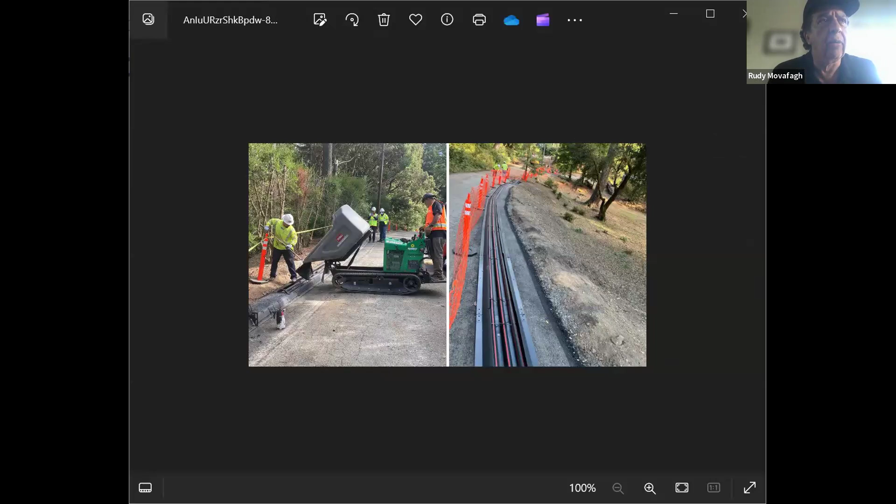In my previous life, when folks decided, okay, I'm going to spend more money, take the overhead down, and build on the ground, there were a number of challenges I tried to solve with my invention. When you have hard ground—rock, granite—it's very, very expensive to excavate. So that's one issue there.

Other places have potentially contaminated soil or asbestos, and the cost of digging up and cleaning that soil is prohibitive to building underground. It becomes too expensive for them.

They were concerned that the roots of the trees would be damaged by the undergrounding system, and they wanted to protect the natural habitat of their neighborhood. So the utility decided, hey, we've got this concept—this seems to be the right fit for what we're trying to do here.

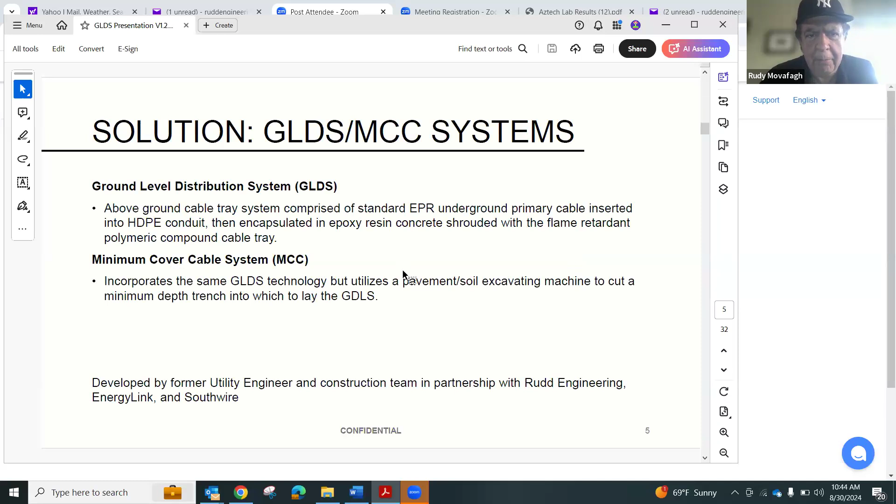So there's two types of construction with GLDS, we call it ground level distribution system, or minimum cover cable system. It can be a bit underground, shallow underground. We do basically a 10-inch trench, bury the system, and put 6 inches of soil on it - actually 1 inch of soil and 4 inches of pavement. We do that where there are water runoff issues, stormwater issues, or if we're crossing driveways and don't want a huge bump on the road across someone's driveway.

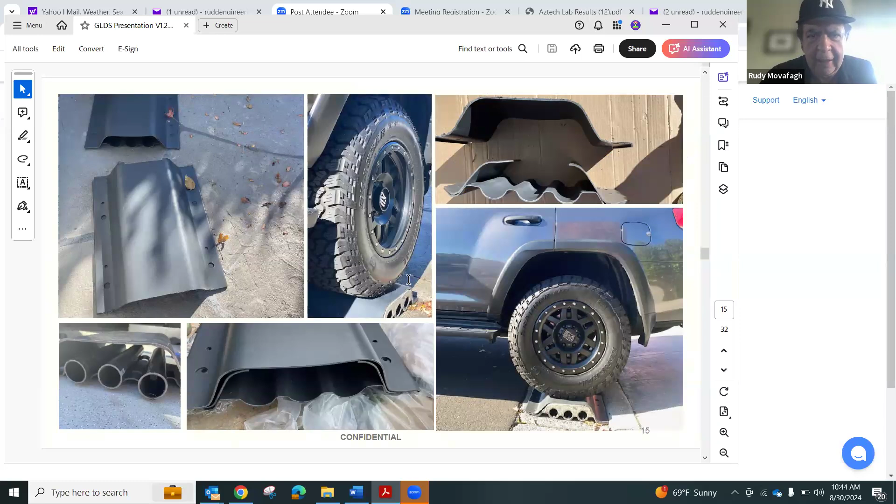I can share this information with you, but I want to really get into how this thing was made. I kind of made this in my garage, started doing it, enhancing it, and ultimately we did a test at the lab where we installed the system.

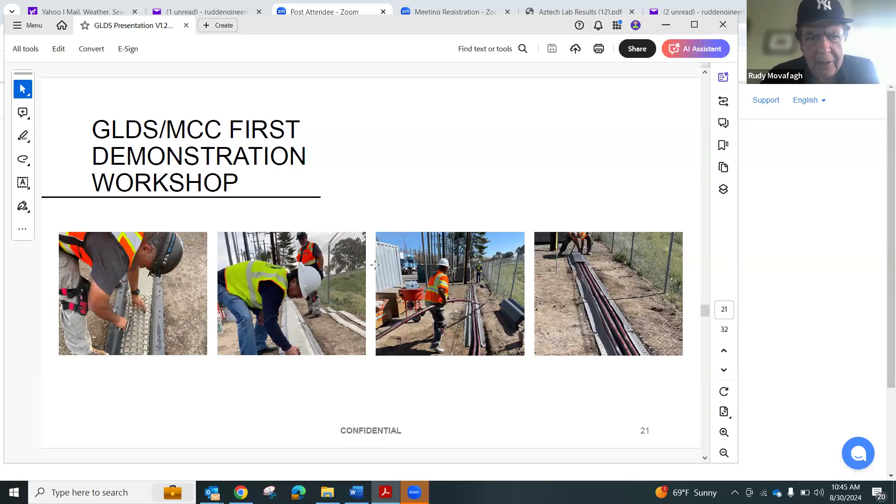You can see me here, hands-on, putting in geopolymer. We have what's called basalt mesh, which is basically more of a rebar thing that allows the concrete to stay together for a long time without breaking up, but also to add strength.

This could be installed to support pad mount construction. So instead of putting it in the underground, you either lay it on the ground, right at ground level, or go shallow ground level.

This is a picture of where we used it, the pilot. If you're in the roadway, we want to make sure we have 90% compaction, so over time the thing doesn't sink in, even though there's really no public or safety issue. It's really about ensuring we offer a system that can compete with other asset systems being built, in their longevity, and minimize any extra things they have to do.

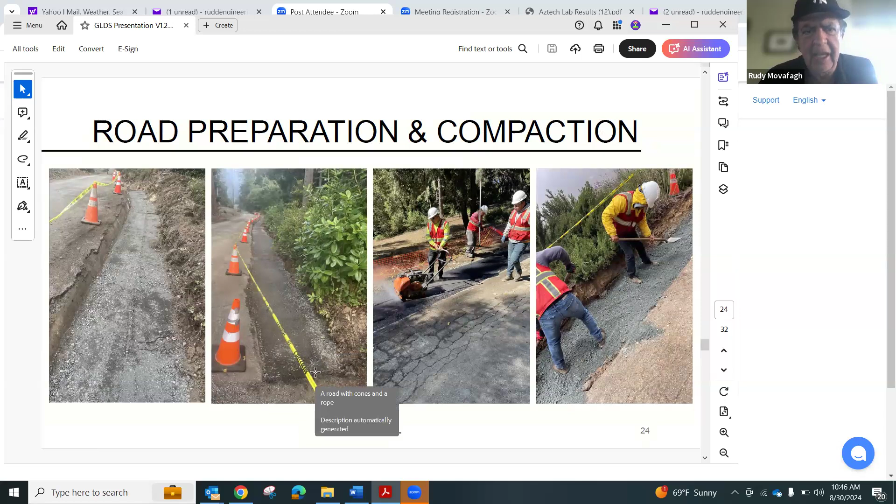Once the site is compacted - now if we happen to be in a pasture area, we don't need any compaction. What we do is leave sufficient slack on both ends of the termination, so that if there was ever erosion or whatever, the system would still stay intact and stay in service without causing issues.

Once that's set up, we set up the cable rail, then we put the cable trays and put the cables inside with the pipe. They come together - it's called CIC, cable in conduit. See it on this big wheel here. We put those in and zip-tie them to make sure they stay intact, because this pipe and cable tend to want to go back to the form they're on that wheel. So we got to make sure they're anchored down.

Then we install and pour our geopolymer in there. Once we pour it, we're basically good to go. We put the top cover on it. Now you have a minimum of 2 inches of concrete around the primary pipe, which is aligned with National Electrical Safety Code requirements. Even though at ground level it's not officially part of it, it's something we need to work on getting accepted by them, but fundamentally it meets the requirement they have. Once it's done, we anchor it down and it's ready to go.

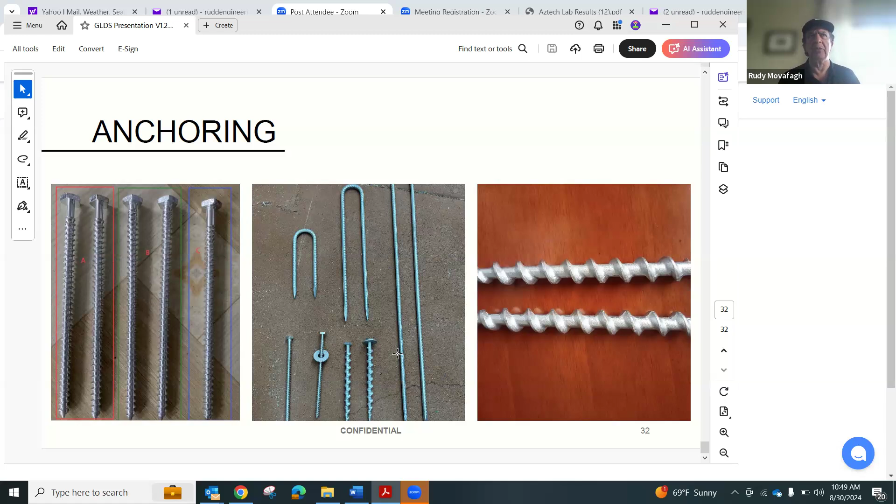Okay, so now we're done. We have very soft soil on Vashon in general. They call it Vashon till. Not in every area, but it's the predominant soil. We'll basically do a test, and then we'll make structural recommendations as far as what would make sense. If you have soft soil that you also need to drive over, that becomes more of a challenge, where potentially we would make sure that we would trench, meaning that we would basically do what you see these guys doing here.

So what we did here, we cleaned up. You can see this is about 4 inches. So once we did that, we made 4 inches, and then actually 5 inches, 1 inch of ground soil, and then we paved it. So this area was paved and gave it more structural integrity as far as compaction, because with the asphalt, you're basically at 100% compaction. And then we put the rail system in. So depending on the type of soil, we'll come up and take a look and make some recommendations for how we could achieve the intent.

So Chuck, go ahead and ask your question, sir. Oh yeah, that's pretty neat presentation. Thank you.

I guess I had a couple questions about the type of cable that's being used in there. Is it different from the type of cable you would use in a conduit system underground? No, it's exactly the same. There are two major types of underground utility cables: either EPR, which is basically a rubber cover, or cross-linked poly. This system is produced by the largest cable manufacturer in the U.S., called Southwire, out of Georgia. Southwire offers CIC, and depending on what the utility specs for cables are, that's what they put in there. California utilities, some use cross-linked poly, some use EPR, but EPR, in my experience, generally performs better. It's exactly the same cable you would put in an underground system.

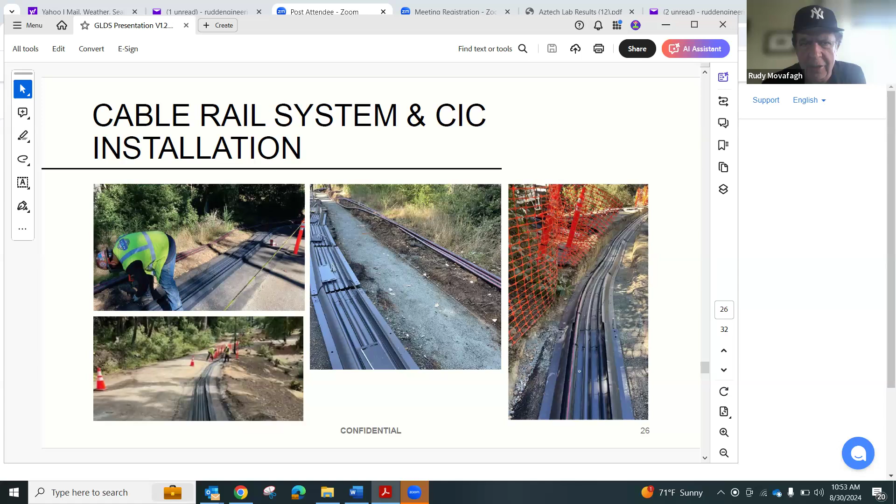Again, one of the benefits I feel this concept provides is visibility. As an underground engineer, we used to have either PVC pipes or CIC—you have no visibility to what's happening to your system. I've had issues where we had a collapsed duct bank and we didn't know anything about it. Then we went to pull cable and couldn't do anything, and everything had to be dug up in an emergency and dealt with that way. So from a safety perspective, with this system, you see everything. No one is going to dig this up by mistake—it's got high voltage signs all over it. If they dig it up, they weren't paying attention.

So in the case where it's placed under the road or buried 10 inches down, is there a requirement for indicators that there's a buried line there? Typically, you're going to see a system like this, and then you see it going down, so yes, there's going to be markings. We stamp the concrete, but the point is you're going to see ground level on both sides of this—you see ground level, then it dips down, and comes up after whatever it is it crosses.

If somebody's looking at that, it's pretty obvious what's going in and out, especially with the stamped concrete on top.

Rudy, we have a regulation at this moment in time that, as you say, came from ancient times, dinosaur times often, and it's not accounting for these new technologies. So this needs to be open to this.

I would imagine that with California's acceptance of this and them getting changes in their code, we won't have to take it underground at all - like initially, to overcome the legislative barriers we've got here. The code's like everything must be a minimum of 6 inches under.

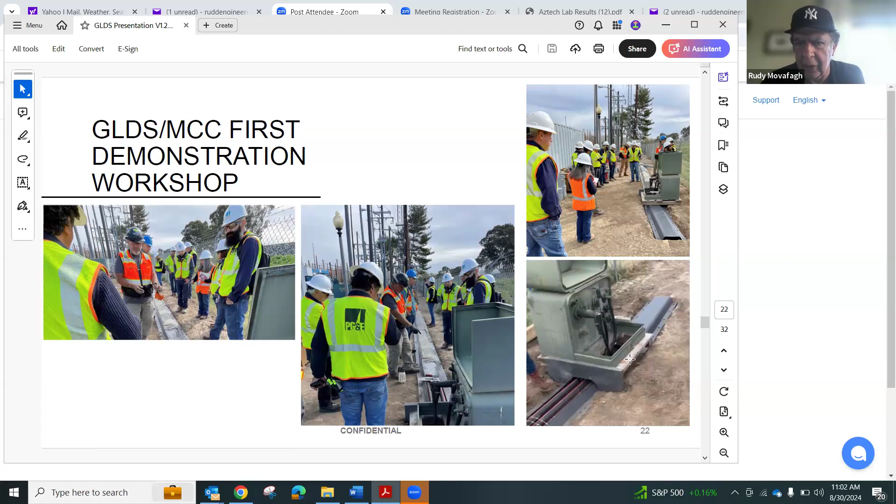No, Chuck, this is not how we're gonna be doing it. We actually have different parts that we use for application. It has a 45-degree fitting that goes into the side, that allows it to connect and then come back out. So depending on where you are, you could use that type of thing. But if you have any kind of restriction, like this particular example, there's no way I'm going to be building a pad right here.

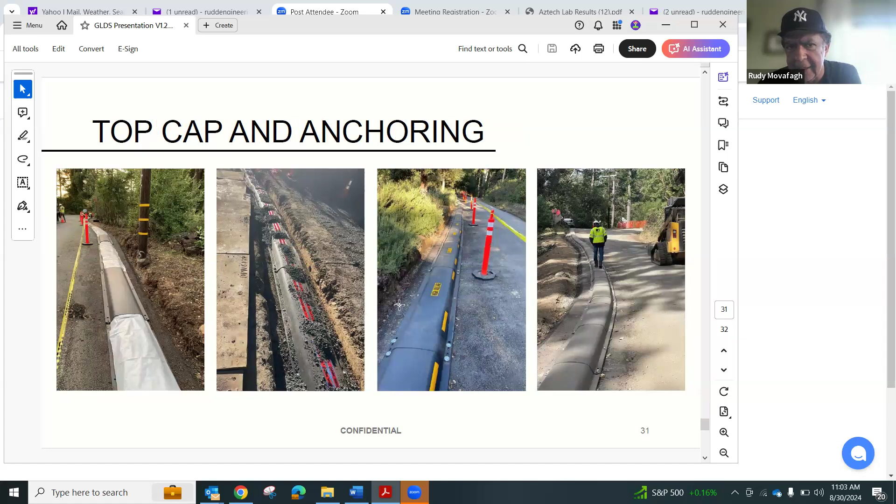So on this application, let's see if I have a picture I could share with you. I don't think we did one. So here, for example, this is on the ground level that goes into a box - this is a subsurface box. The GLDS goes through there and connects in there.

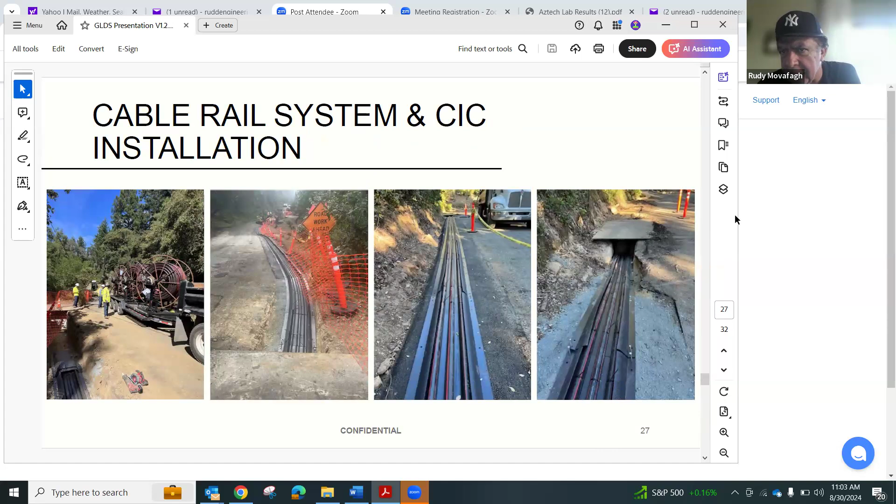Now, this particular setup across from here is where they had a transformer pad mount, and then we tapped into that box and brought it up. But we will design the system per the utility spec - whatever the local utilities' requirements are, we can meet that and do a design for them that's aligned with their spec and requirement for construction. We have all the different components.

That's interesting. So the type of vault that this connects to, is it different from a burial vault? Obviously it's going to be shallower. No, these are standard - if you want to look it up online, you could call it a prefabricated number 5 box, you could kind of compare it to that.

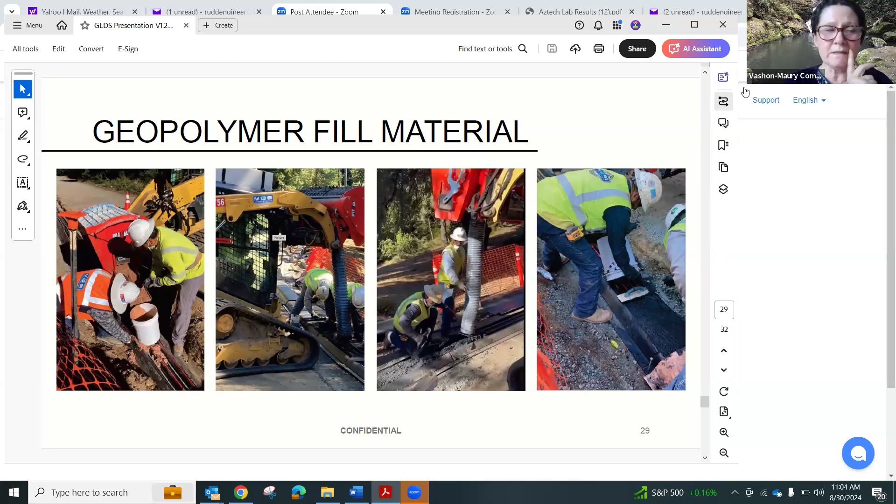This is something some of our local engineers have talked about, Rudy, and they've talked about doing 9-foot vaults. We believe from our conversations with you that isn't part of the picture with the GLDS. You could do that - we can do whatever needs to be done, we can adjust our system. If they want to do a 9-foot vault, what we would do is build a GLDS up to 6 feet prior to reaching that vault, and then we would excavate, go down, and bring the pipes into the side of that.

What I'm going for is that I don't think there's a necessity with the GLDS system to have that kind of setup. I think they're referring to traditional undergrounding techniques, which require these huge vaults.

That's from my conversation with Brad Curling too. He said we never go more than 30 or 36 inches, even with traditional undergrounding, whereas our local people were saying 9 foot. He said the only thing he could see that happening with would be if you had to go under a creek.

Some experience I have from working at the airport with the vaults is they have to be big enough and adequate enough that you can pull cable in and out, and get inside to make up T-taps. People may have different rules. I know the state of Washington and the electrical code have rules as to how big those vaults need to be, so that's all information that's available.

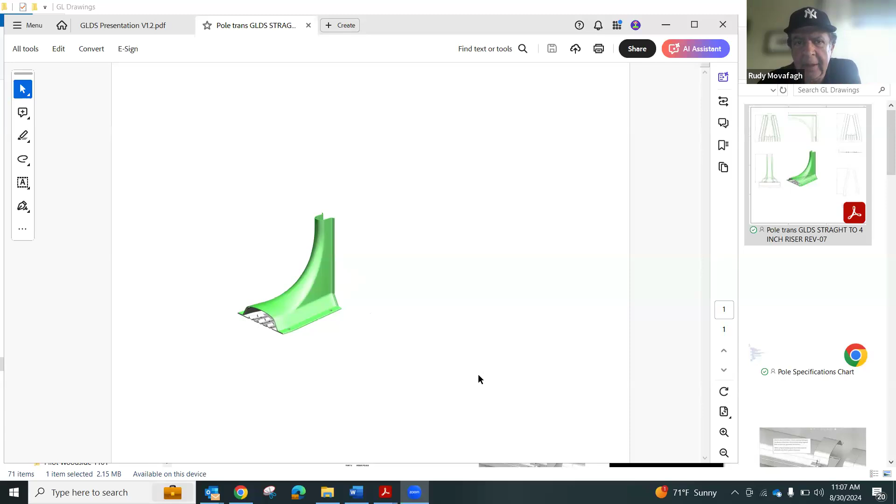I have another unit, if I may, just different drawings that we have. This is a conversion from ground level to below ground, allowing for deviation in elevation. 6 inches below is the bottom, so you have a bit of a cover.

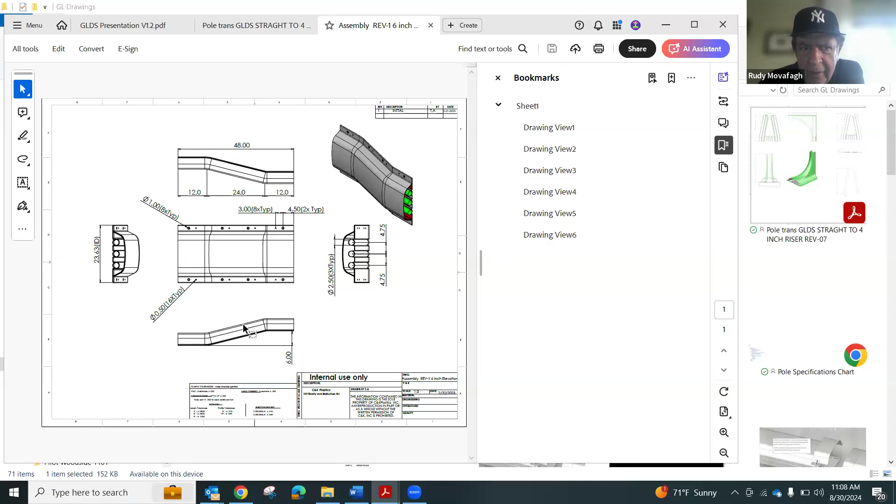We actually redesigned this because there were concerns about this area being structurally too shallow, and over time erosion could expose it. So I've modified this design to make it more square. This is a new concept.

It's not a silver bullet - we continue to enhance with our learnings. Our goal is to provide the best system that we can. Being a utility engineer, I'm well aware of some of the challenges, and I understand the dynamics and the internal challenges. The reality is we just gotta work collectively to address these things and work through it.

It was wonderful having the conversations with Brad. He was talking about how it's typical in the industry to have these benchmarking conferencing events, where people from all over come together and find the best technology offered at the moment. I wanted to run through a couple of the numbers with California.

I know the goal was like 10,000 miles undergrounded - is that right, Rudy? 10,000 miles, they wanted to get to 1,000 miles a year. The regulators here didn't approve their request, so they went down to 350. But I really feel like the CEO at PG&E understands the challenge, and I think she's doing everything she can to do the right thing.

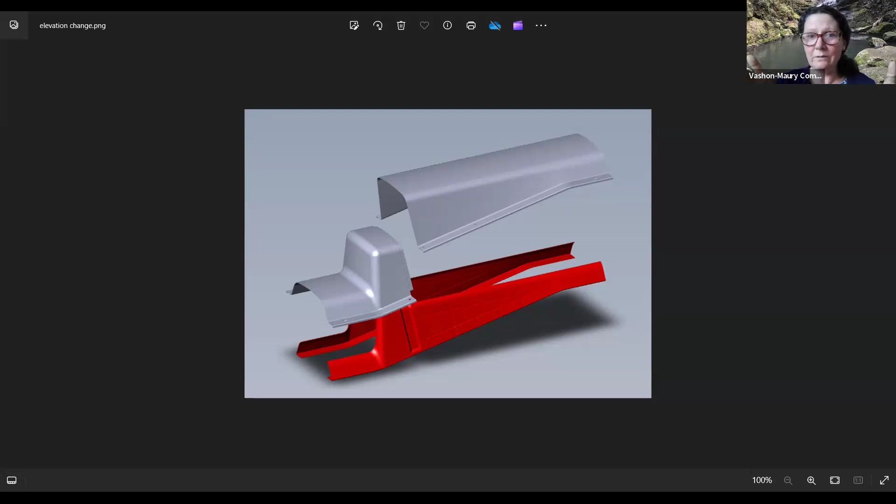Even wildfires, where people are familiar with it because of the California experience, even in Lahaina, Hawaii, which has a subtropical wet climate, wildfires destroyed the place. We've had wildfires in Texas, wildfire in Colorado, and two years ago we had a wildfire in New Brunswick. Who would think we'd have a fire in New Brunswick? Coming from Boston, that was always wet and cold. It's not like we have 8 months of summer, or 8 months of no rain like California where things dry out completely.

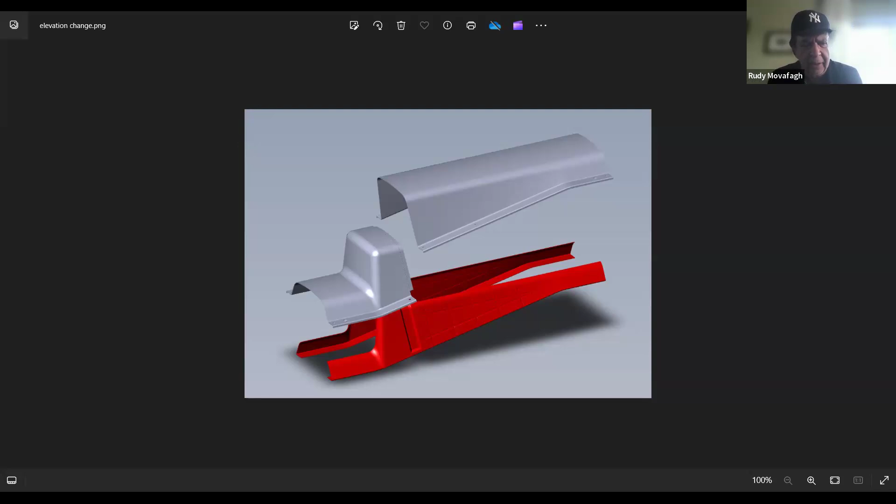But this is a challenge we have to stay on. Australia is dealing with it. We have some implications in Europe where such events have happened. But anyhow, what I'm showing you here is our new design for the elevation change.

As you can see here, Chuck, we made this 90-degree angle to prevent the issue from the original design, which was more of a slope. This will eliminate the erosion issue because structurally it gives you the same change in elevation, but it keeps everything square. So when you cover this side, which is to be below ground, it's not going to have any structural implication over time.

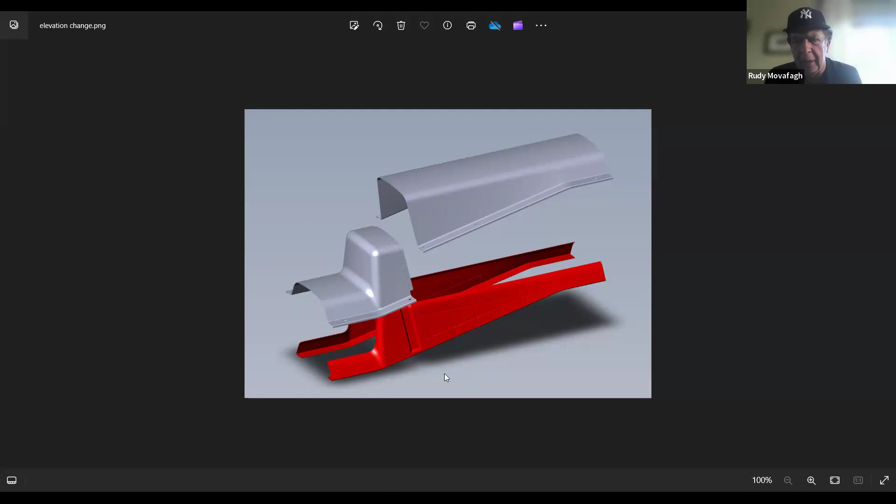The lowest cost per customer, we've spoken to that significantly already, but some of the numbers I've been told by people in the industry here, connecting with PG&E, I've heard 2 million per mile for overhead, and as you say, these are averages, 2.2 million for undergrounding. Yes, we are very close. My goal is, if we go in the direction we're going, to be cheaper than overhead.

Right now we use a technology called thermoforming. It's very time consuming. I don't have enough orders to transition to extrusion or injection molding. If I can go to extrusion, material costs will go down by 25-30%. My goal is to get to 1.75 million per mile at the max. Right now on the pilot we're about $150 per mile for material and $175 for labor, so around $325 total installed cost. I'm cautiously optimistic I could reduce that by 20% at least.